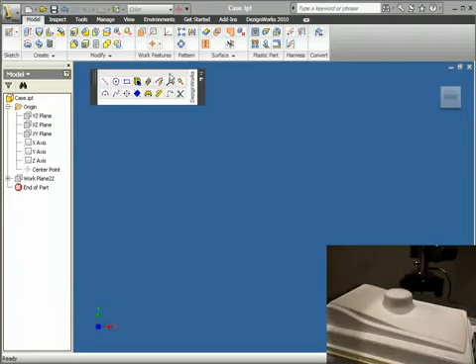This ribbon is very similar to the sketch ribbon in Inventor. We'll first just pick a plane to work on and start a new sketch. One of the key features of DesignWorks is, since you're already an Inventor user, we've kept the DesignWorks ribbon interactively similar to the ribbon in Inventor. So if you already know how to draw in Inventor, you're already familiar with our tool.

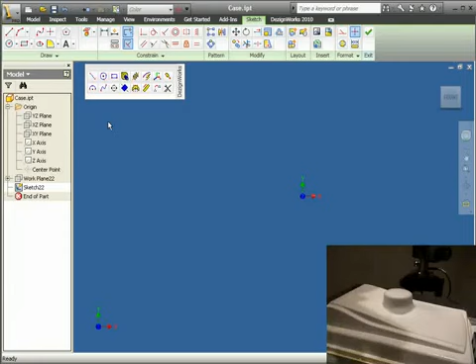It can be moved around, pinned, or redocked. So the first thing we're going to do is outline where we want to work. Our goal is to create the freeform surface of this top part. Let's go ahead and use the DesignWorks line tool.

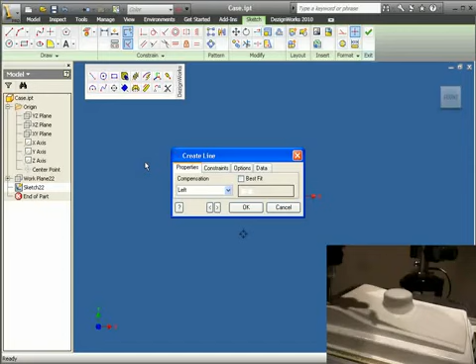It supports full compensation, and it can be done in two modes: a normal 2-point or a best fit where you can drag it. So let's first outline where I want to work. I'm holding the digitizer device against my edge and depressing the button to take data. I can use this in any format. In this case, I'm creating some lines to outline where I want to have my trim edge.

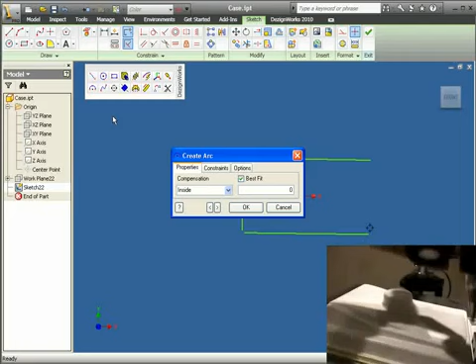I'm now going to jump right into the Arc tool. We're going to utilize DesignWorks' Best Fit capability, and I have it set to take data about every 1/4 of an inch. So I'm simply going to depress the button once, drag, and when I've finished, depress the button again, and it'll capture my profile. You can interactively move right into the Inventor trim tools.

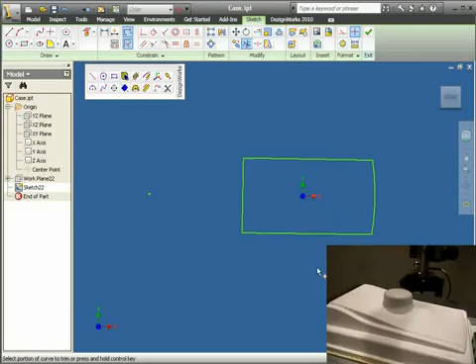We're actually going to just extend these corners to match. Our goal is to use this later for making a boundary. And we can also trim. We're going to save our part and move to the next step.

Now that we have our boundary, there are some items in Inventor called work planes. I've gone ahead and actually created some ahead of time. So we're going to come over here and turn these on.

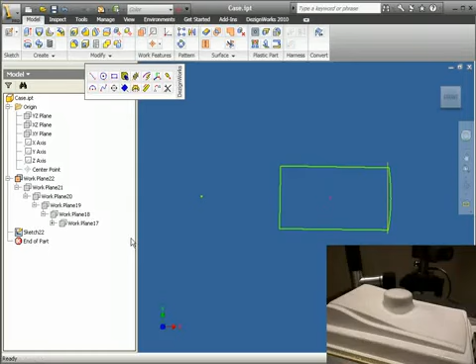DesignWorks creates planes as well as work planes for Inventor. So what we'll do is show you where these are at. We'll expand them out rather than take the time to build them all. You can see we've created these, so we allow us to select these in the tree. We'll make them visible.

Now the reason why we want to do this is DesignWorks has a key feature. This tool allows you to take the probe and interactively drag it across the surface. The key feature of this tool is to allow you to capture a freeform shape, but give you the ability to go back and edit and make changes. DesignWorks is the only product of its type that can actually store the movement of a device and replay it for a later need. So let's show you how this works.

We're going to select the Locked Planes tool in DesignWorks. The nice thing about this tool is you don't have to worry about making the points too close or too far away. We have a unique database that stores all the movement of the device and can replay and reorder it. We're going to tell it to create curves and maintain a distance of every 1/4 of an inch.

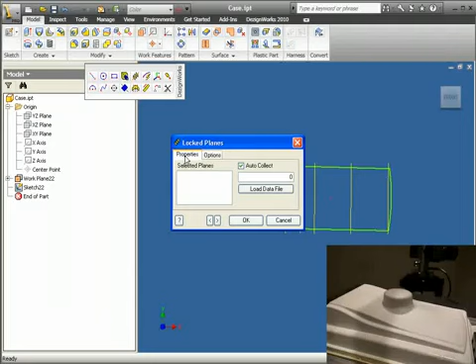So I'm going to select some planes I want to scan through. Now you'll notice I'm going to leave a couple out here. We simply take the device, hold it, make sure it's in contact with our part, press the button once, and drag it across the shape. We're now making the device seem like a scanning tool.

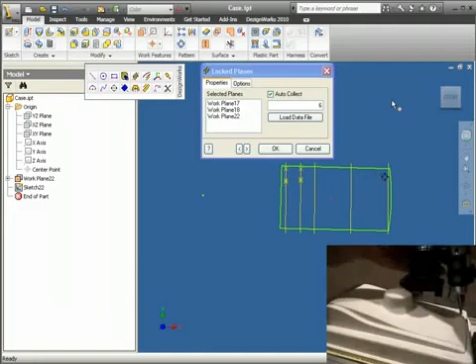Now you can work in one place, say I wanted to make sure I was getting this very fine detail on this edge. I can work in one area, or if I know I may want to add more cross sections, I'm going to make sure I scan the whole part. Again, the reason I'm going to scan the whole part is I may need to get more data.

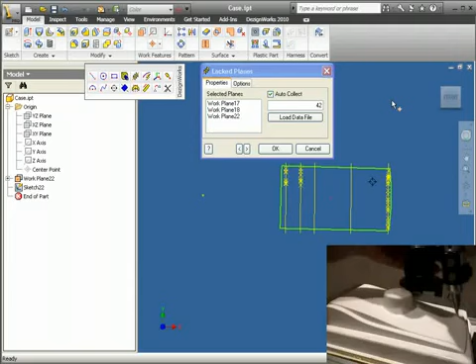The nice thing is you can collect the data once and not have to rescan. Or in the case you don't have access to the part, you don't have to realign and start over. Again, DesignWorks is the only product of its type that has the ability to interactively scan, store the data, and replay it at another time.

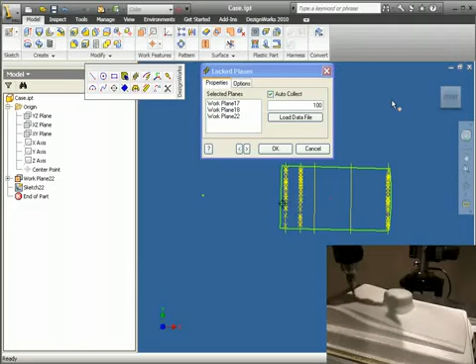You can also stop and look at your data. So if I want to stop and zoom in, I can. Again, if I want to do a really tight scan on this area here, I'm going to stay in this area for a while. The only key feature is holding the probe against the part. I'm not depressing the button. I've hit it once. It makes it active.

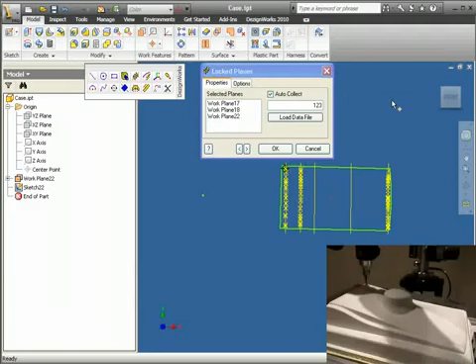I'm going to fill this area in because I'm not sure if I have enough work planes to collect data on. Once I think I have enough data, I'll stop and check my part out. Let's rotate the part and see where we're at.

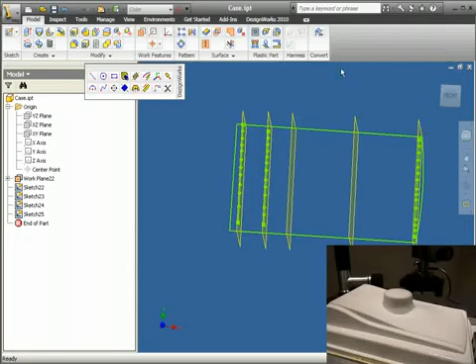Looks pretty good. I'm going to tell it to go ahead and build it. Now I have my cross sections. I could use my surface tools, but what if we needed more data to get a more distinct shape to this?

We can go back to these work planes and add more. Simply in Inventor, select the work plane tool. We're going to drag this over here, repeat the command, and drag this over here.

Here's a key feature of DesignWorks: the whole time we were scanning, we have the ability to reuse that data. DesignWorks is the only product of its type that can do this.

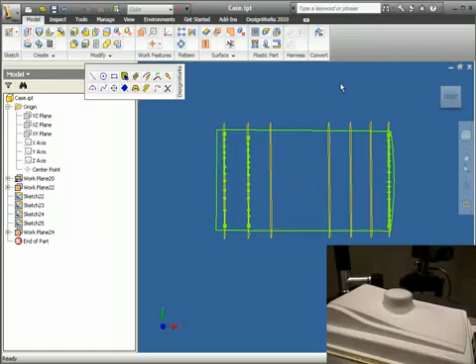We're going to go back to that locked plane tool and select the planes we want to add. We want some data on this one, this one, this one, and this one. We can simply say load data.

The whole time you're scanning, it was built to a relational database, and here's the file. It has the same name as the part with a date stamp. Now the biggest question we get all the time is, how big is this file?

People are used to point cloud scanning - it's hundreds of megs. This file, you can see, is only 40K. Again, 40K. We're going to select that file and tell it to reload the movement.

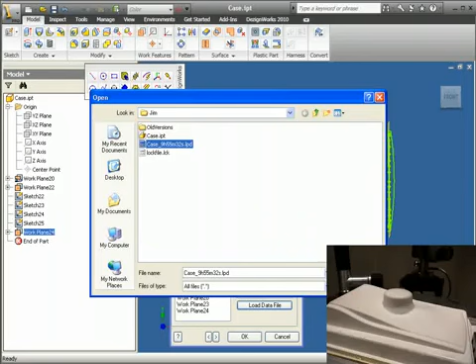It's going to repopulate those cross sections. We're going to go ahead and say OK. Now we feel we have enough data that we can build this freeform shape.

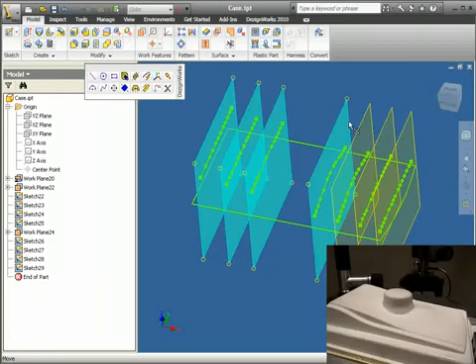Let's hide our work planes. I'm going to select these and make them invisible. We're now going to use a tool in Inventor to create that top loft. We'll come over here and use the loft tool, and select these cross sections.

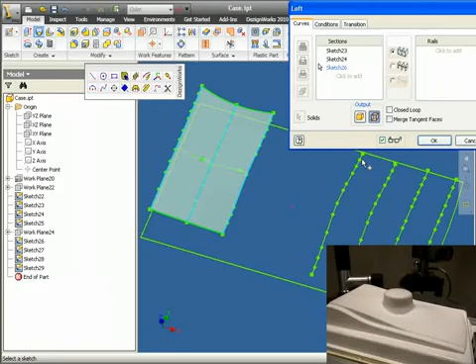Again, this is a pretty complex freeform shape. It's not something you could do with measurement tools. You would need some kind of coordinate measuring machine, and doing it the old-fashioned way of collecting points could take you days.

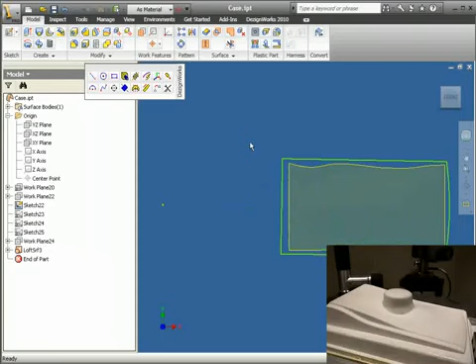There's our freeform shape. Now we're going to use another tool in Inventor to actually extend that, because we want to trim it off to make our bottom piece. So we're going to use some surface tools here to extend these surfaces.

I can do all edges or one. Let's first try to do all edges. We're pretty close on the size. Let's see if we can stretch this all at one time. I'm going to give a little bit more distance here.

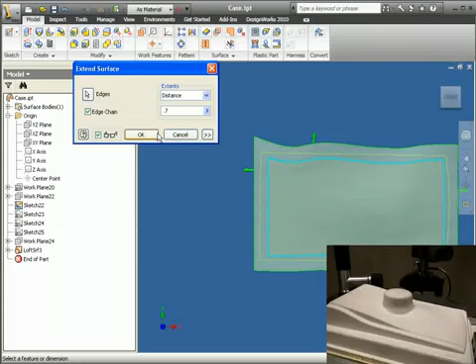And I've now stretched it. The reason why I'm doing this is I want to build the base to come up to there. So I'm going to go ahead now and build our base.

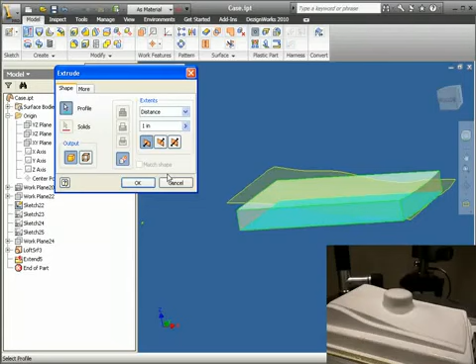Let's go ahead and use the Inventor tool here. Let's take this bottom profile and grab it, and we're going to tell it to go up to next. Our termination is going to be this base. Now you can say we've got our mold, or actually in this case our case.

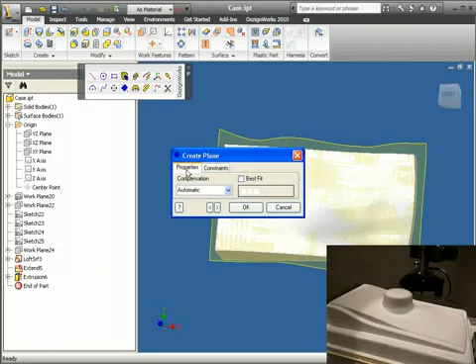Let's go ahead and add the boss on top. DesignWorks has a tool to build a plane up here. We need to create a sketch. So we're going to capture the data on top of this plane and build that boss.

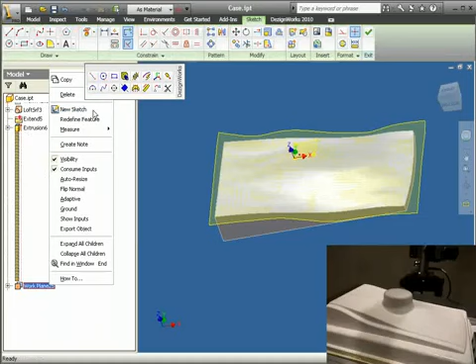So we're going to use the circle tool. We'll pick a face and start a new sketch. We're going to use the circle tool to capture this data. Again, it can be done 3 points or a best fit mode.

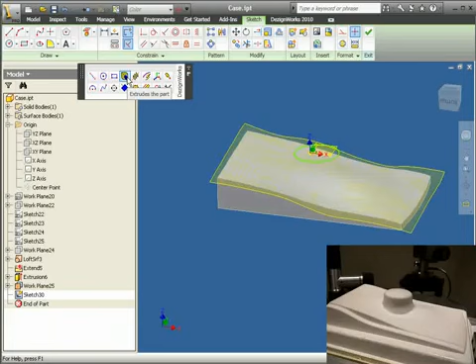We're now again going to use that boss and take it down to the other surface. DesignWorks has its own built-in extrude, which we've shown in other versions of DesignWorks TV for most prismatic parts. In this case, we're going to use the up to next.

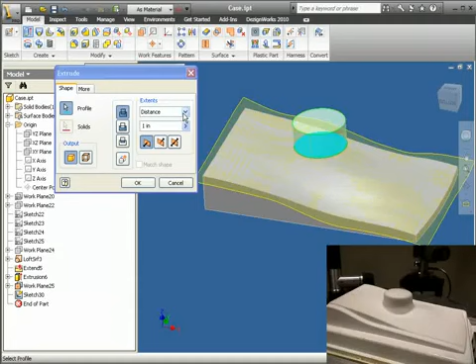So we're going to grab the tool, grab our profile, and we can grab it from the tree, and we're going to tell it up to next. Now we're going to go ahead and finish this tool.

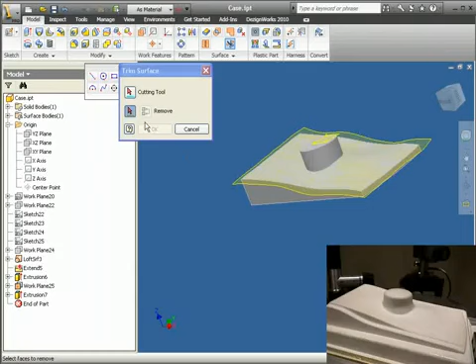There's one thing we want to do - trim this off to the right size. Let's use the trim tool in Inventor, and we'll say our cutting tool is this base, and we want to remove these little tabs.

Now we have our part trimmed, and we'll do one more thing. Let's go ahead and add a nice fillet around the boss. We'll use a 1/4 inch.